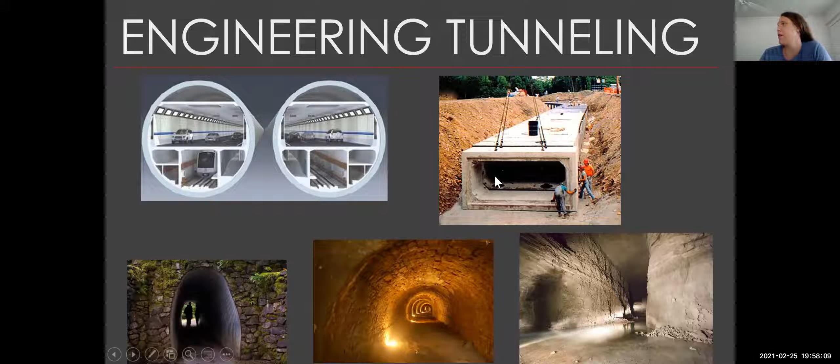This is actually water storage tunnels, and then these are cut and cover culverts. Here's some more tunnels. If you've ever been up to Seattle, or multiple subway systems, you'll see these segments. These are actually built with a machine called a tunnel boring machine, which I'll go through in just a second.

This right here is a really cool mechanized shotcrete arm, and it's actually being controlled by a remote control. So if you're really good at gaming, you could say, oh man, I can do that. It's pretty interesting. And we have these huge pipe systems. And when I say tunnels, I mean large diameter tunnels.

You can work on small diameter projects, 2 to 3 feet, maybe even 4 feet. But what I really like to work with is anything that I can walk into. And I don't mind doing small stuff as well. But when you start to get in these grand scale projects where you're in 20, 40 foot diameter machines and excavations, it's just a whole nother ball game, and it's really fun and really exciting.

And you get to interact with so many different types of people from all different backgrounds. That's what's really great about engineering in general, is that you're not just sitting with a bunch of engineers. You're also sitting with hydraulics personnel, operations, people in marketing, people in finance, scientists. You have so many different people that you're working with, and you can learn so much from everyone, which makes it really fun.

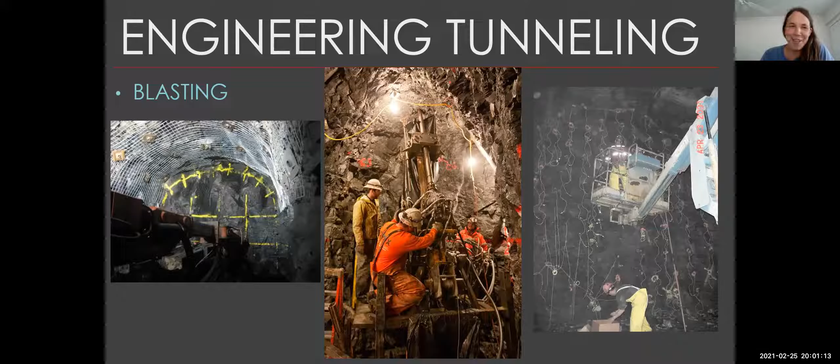And then the other method is using a road header, which kind of looks like a Total Recall movie machine that is going to take apart the rest of the world. It is a really weird machine, but it just grinds away what's in front of you. And then this machine is called a tunnel boring machine. This is the most common machine that you would see nowadays.

I think it has been getting a lot of press lately because there's companies coming out like the Boring Company who are showcasing machines like this. But there are about 6 or 7 different manufacturers of tunnel boring machines all over the world. That's another thing about tunneling. The United States tends to be a little bit behind when it comes to building tunnels.

The people who have been the most influential over the last couple centuries is Europe, Norway, France. They have the channel there between England and Paris, and actually also China and Japan. In Japan, they have 2 TBM manufacturing companies. Germany has Herrenknecht.

The United States does have one, and we're slowly up and coming and considering that tunneling is a good way to go, mostly because land is expensive. And so if we can go underneath and try to minimize the footprint, at least on the surface, it maybe is the better way to go, especially in terms of traffic.

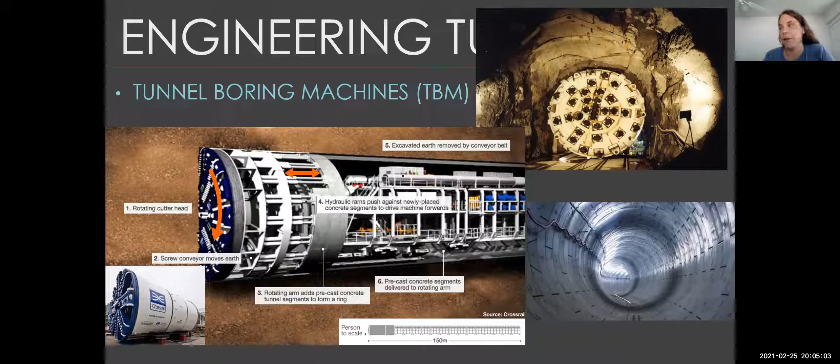I just want to give you a couple projects, because as you drive around, I don't know if anyone has been through the Caldecott Tunnel between Walnut Creek and Oakland, but I recommend to take Highway 24 and go through the Caldecott Tunnel. There's 4 tunnels. 3 of them are on the southern side, and they are old tunnels. But the newest one is on the northern end. So if you're driving from Walnut Creek to Oakland, get in the right-hand lane and make sure you get into the new tunnel.

And you can see the tunnel will look like this. So the phase 1 and phase 2, this is how the tunnel looks as you drive through on either side. I think I have a final photo of it. There we go, driving through. And this tunnel was excavated using a road header in a phase 1 and phase 2.

And the reason why we did this is phase 1, we cut just the top because you could reach it, right? It's a simple concept, but sometimes you don't think of the simple things. And that's one thing you always have to come back to: if you're making engineering too hard, you might want to pull back a little bit and see if you can see things in a simpler light.

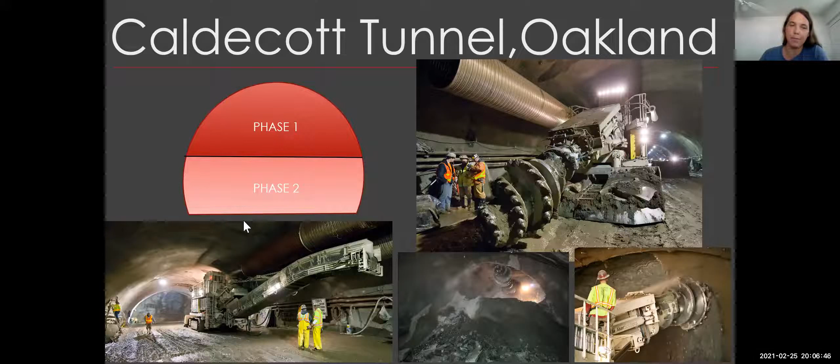Because there is a simpler approach, and this is what our approach was: see how we could actually do all the work at the roof by only excavating the top half. And then once the roof was done here, we were able to drop it and do the second half underneath. It's just a really simple way of solving that problem.

The other thing I just wanted to pull out here is, this is the lead up to the tunnel, and so you can see these benches in rock. The best way to know what's going on geologically is just driving around and seeing what the cuts in the roadway look like. This is one of the main ways we were able to design the tunnel, just walking out here and crawling up on the rock. So always look around you.

The other tunnel project I've been working on, I know I don't have a ton of time, so I'm going a little quick. You're good, you're good.

Okay. The other project that I worked on is the Kaneohe sewer project in Oahu. I worked on this project as a sewer tunnel about 6 years ago, and it was a great project. We went through rock and soil, so we used a tunnel boring machine and a road header. It's about 4 miles, 15 foot diameter.

We were about 800 feet underground, and the reason why I'm here in Hawaii now is because I worked on this project, and there's a new project that's coming up, a new sewer tunnel in Waipahu, which is down here, and the city and county who owns this project just called me up and said, "Hey, we got a new project. Are you interested in working on it?"

And that's actually how you get work. You do a good job on one project and someone calls you back later. And you always want to keep good relations with owners, with clients, and always try to be on good terms with other engineering companies too, because you never know who's going to be your boss at some point or who is going to give you the next job.

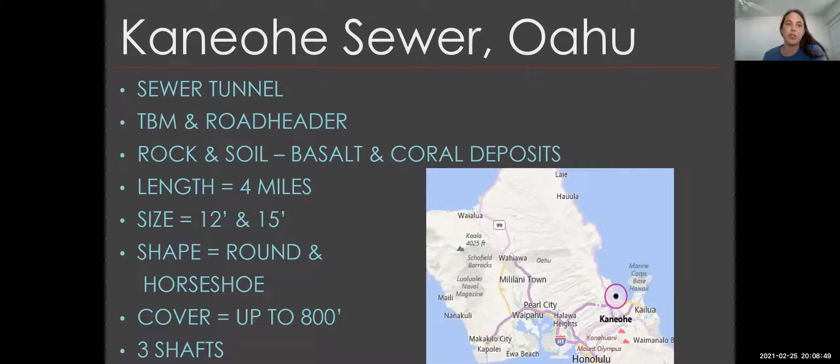And ultimately, we moved out here to work on this next project because I had worked and have experience on this other one. So it's always good to use your past work as launching points for future work. And if you can get a company to back you in sending you, that's even better. Definitely. And I have some other things about that too.

But when we're first designing a tunnel, you have to do a lot of drilling. And so we spent a lot of time just collecting rock cores, and it's like beautiful blue basalt. I just love this rock. And then, like I said, driving around and seeing what kind of rock cuts are around here.

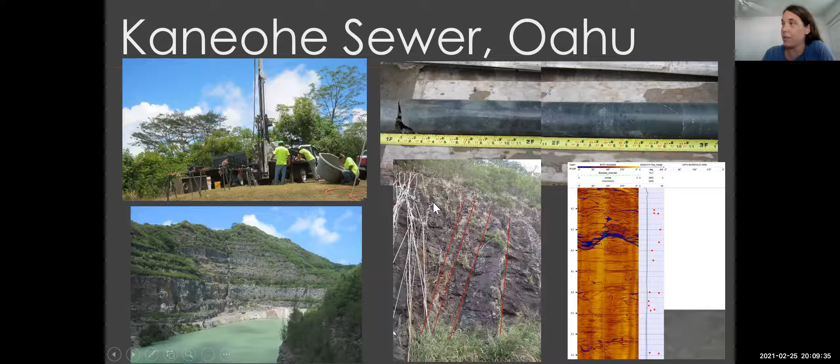We literally pulled off the side of the road, started mapping this rock and used that to determine what our jointing would be below the surface, 800 feet down. There's a little bit more to it, but ultimately, we don't always have to drill holes. You could also check what's on the road.

This is the tunnel alignment. We started in Kailua. It's a gravity tunnel, so there's no pump stations, and it goes underneath this mountain range, and then it ends at the Kaneohe drop shaft. And then there's an outlet here that goes over to Kaneohe Bay.

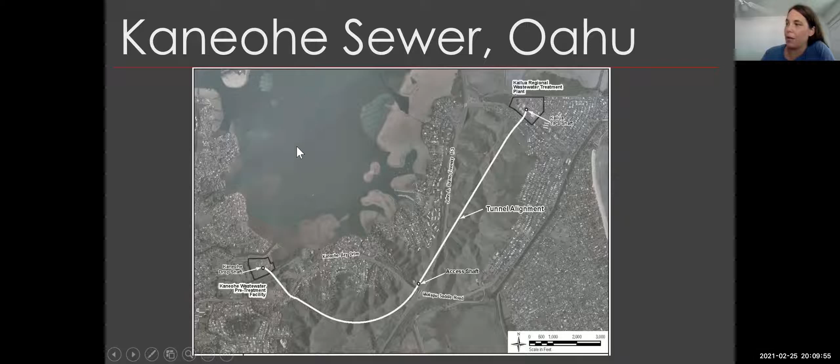This was the tunnel alignment. So that's in plan view, right? A bird's eye view. And then if I took a cut and a cross section of that, this is what the cross section would be.

So we first have to build the big shaft, right? We're going deep here, so you still have to do a big shaft, and this is really fun to do. This shaft was called a slurry wall shaft. You pretty much build a trench, and you use bentonite to keep the sides from falling in on you. And you use these big machines called slurry wall machines, and they just grind up the material and suck it through a vacuum.

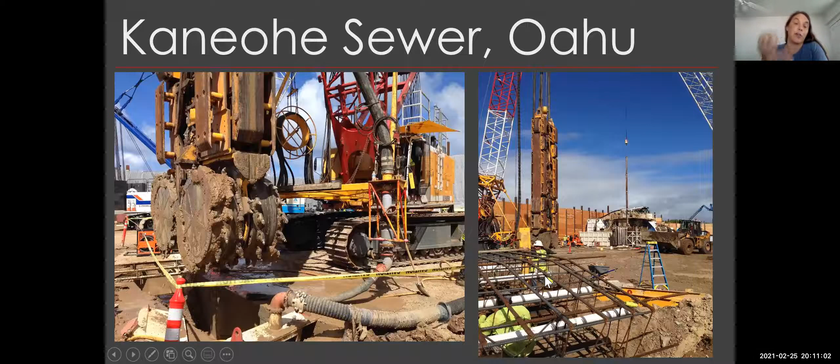And then you have a rebar cage, and then you tremie the concrete from the bottom up. And so it makes these really nice concrete panels. Most panels never look this good. I'll just be honest, this one actually looked really good.

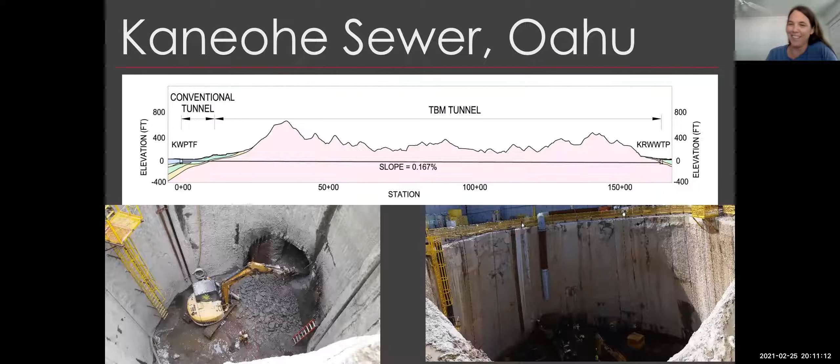And so here you'd see some of the joints that water comes through. Water is the worst thing for a tunnel. Some people say, oh, isn't rock hard to excavate? No. Rock is the best, unless it's jointed with a lot of water. Sand is the hardest, but ultimately, these joints we need to always pay attention to, which is why you drive on the side of the road and find out where the joints are.

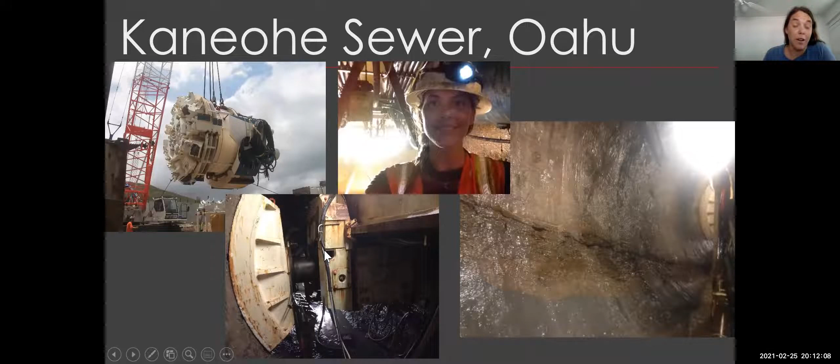And there's a lot of perks with traveling. The joke is there's never a tunnel where you live. And so you tend to have to travel a lot, which I am okay with. I really enjoy it. That's part of the reason why I was really interested in tunneling in the first place. So if you want to travel and experience new places, this might be an opportunity that you'd be interested in.

And this industry needs people. So everyone, especially right now, is like, do you have people? We need people. So if you were looking for some security for a job and to be able to travel, it is a good opportunity.

Just wanted to quickly go through some of the opportunities that I've had with Engineers Without Borders. Something that I've always been interested in is being involved not only on the engineering and work side, but also in my civil responsibility. I'm really passionate about doing international and local aid work. I want to make sure you include local aid work because it's always important to reach out to your local community where you live.

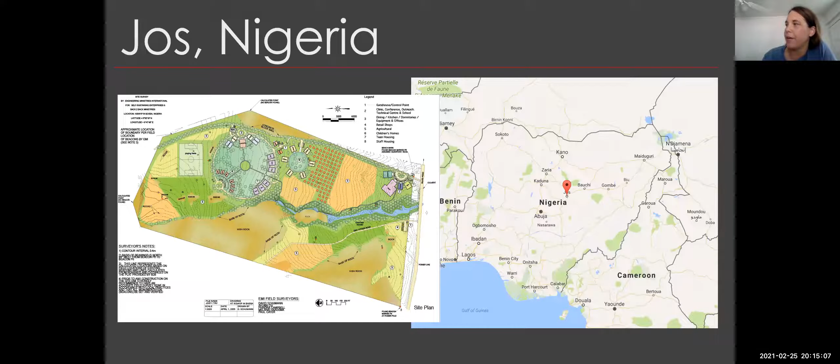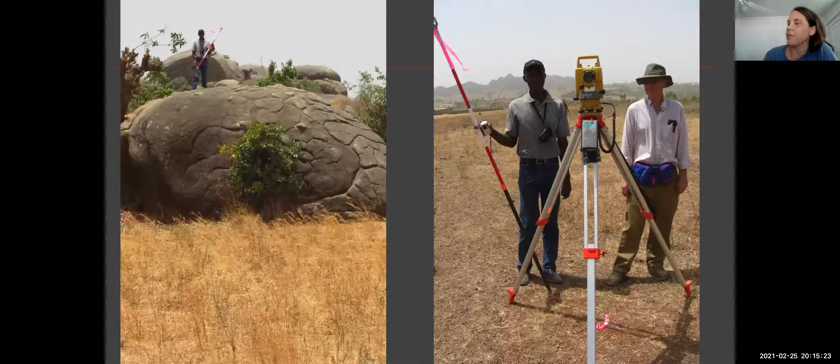I also did a project in Nigeria, doing an orphanage support center. I was part of the survey crew. I just love this landscape with these huge boulders. They're absolutely fantastic. We collaborated with local workers too, and it was such a great opportunity. Some of the kids got involved too, which is always really fun when you travel, seeing the local kids get really excited about what you're doing.

It's just amazing to be able to travel and see some of these things and realize how things like PUR really are important for the health and safety of communities. And then there's always some fun, like running around. And we would also be working on some wells, which is really great.

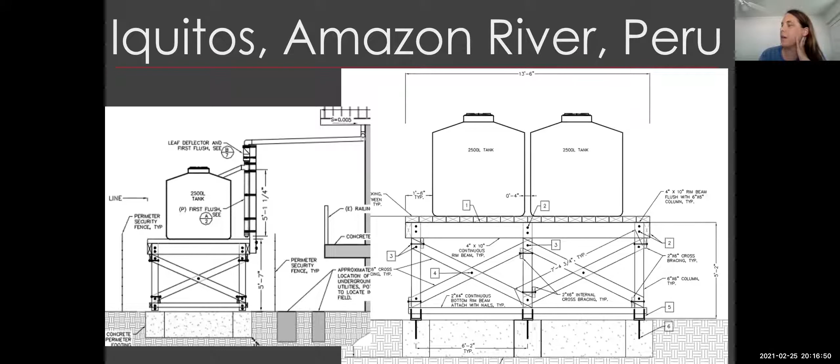I've also worked in Iquitos in Peru on the Amazon River, doing a stormwater collection system. This was a fantastic place. I actually did this with EWB as well. The other project that I did in Nigeria was with EMI, a different engineering outreach group. I still work with EMI, and I go to Uganda every year to do projects. Last year I didn't get to go, so this year I hope to go. That'll be my 4th year going.

But this project is in the Amazon, which is pretty epic. We were going to these small communities and working with the locals on building these rainwater catchment systems. Such great people. I learned so much on this project, because like I said, this isn't my wheelhouse, but building the frames is. I learned so much about these systems and how the locals use them.

And what's great is I was really influential in designing this platform, because the Amazon floods every year, and the water level actually gets up to here. And so they still need to get water.

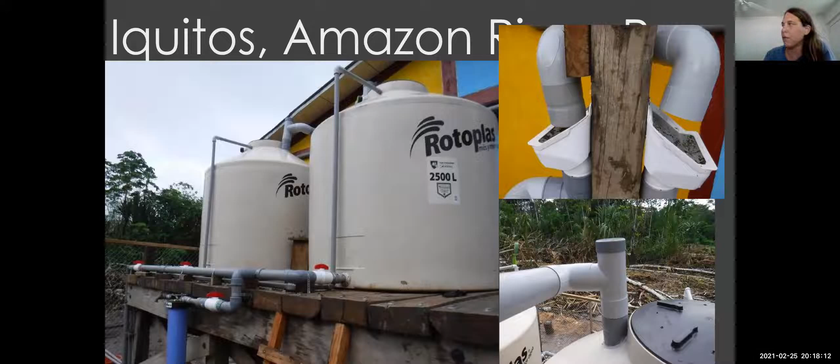And so we had to just make sure everything was designed appropriately in order to make sure they got water during the rainy season, and they used their canoes to get their water. And we have a training course for the locals. I haven't gone back here, but this team goes back every year to make sure all the systems are working. And we have about 8 systems right now.

And we've actually started training the local crew, and actually this guy, Jose, he's been influential. He lives there, and he helps train locals to build them themselves, and helps get the resources financially in order to do that, in order to drink clean water there. These are previous systems that they check on every year.

And of course, how would students get involved? EWB is the perfect way that students can get involved, because EWB is designed for students. And if you're interested in this kind of stuff, make sure you look at universities that have EWB programs already set. I helped start the first EWB program at Cal Poly.

And not that I wouldn't recommend going to a university that doesn't have one and starting one, but it's a lot better if you go to one that's already set, because they're already working in the communities and they already have things going. So if you're really interested in it, go to a school and just call them up and start going to their meetings and just get involved. It really will help change your life.

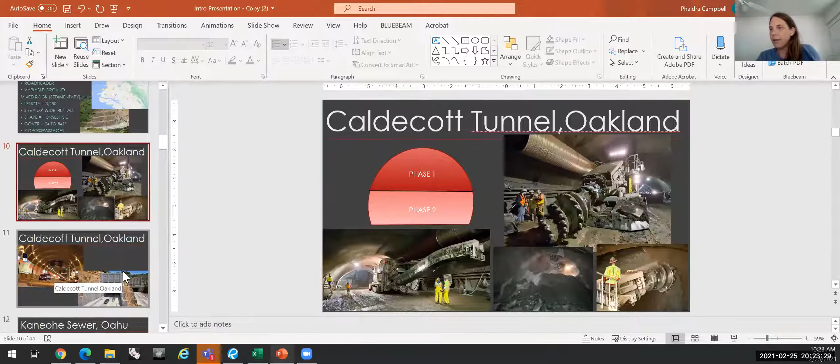How do you hold up loose rock and dirt while making tunnels? That is a great question. You use a support, what we call a SOE, or support of excavation. And I'll show you a quick one of that. This one, this is a good one.

So this is a support of excavation. You use ribs, steel ribs, and boards to connect those ribs. This is in rock. If the rock's really bad and jointed, you would use these. And if the rock gets worse and worse, you tighten them up and make the distance shorter and shorter, so the ground can kind of bridge between them.

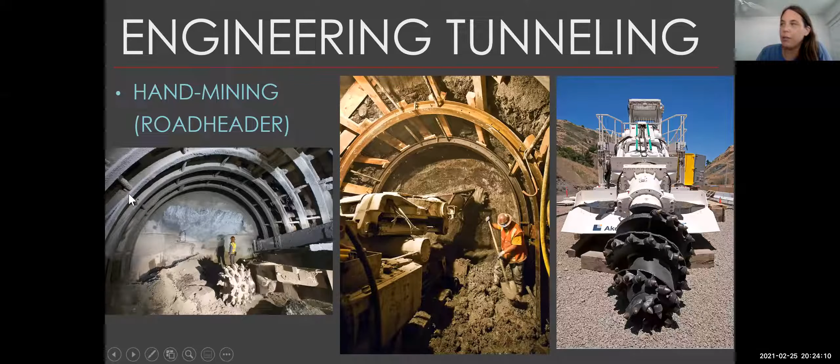If the ground's worse, like this is actually a winery. We do a lot of winery projects. I haven't done any recently, but I used to do them quite a bit. So these are those ribs, but you use shotcrete, which is what you just had, the arm. Yeah, it was like spraying. Shotcrete is a mixture of cement, water, sand, and small pea gravel. So it's like concrete, but not with a big aggregate.

I think Crystal has a question. Yeah, I was wondering what the training process was like after you got out of school. I imagine you didn't take a bunch of classes around tunneling. Did they teach you a lot? Did they expect you to know different things? How was that? That's a really good question, Crystal. Yeah, that is a really good question.

You're right. I didn't know anything about tunneling when I was in school and when I got out of school. After I graduated, Cal Poly started doing a couple tunneling classes, and I've gone down and taught a couple. They're kind of like one-off classes, not full-blown classes. There's only a couple schools in the US who actually have tunneling courses, I think Virginia Tech and Colorado School of Mines. There are more internationally, definitely in Norway, France and Germany.

But when I got hired, people in this industry just tend to not have any experience when they come out of school. Typically you'll get put with a mentor, if it's a good company, who's been doing this for a long time, and you absorb as much as possible. You usually get thrown onto a construction site. The first two years, you are just trying to get a grasp of the scale of these projects. These projects are huge, hundreds of millions of dollars, sometimes billion-dollar projects. So you're not going to know anything coming out of school, and you have to be okay with that, be a little humble, and really learn from others.